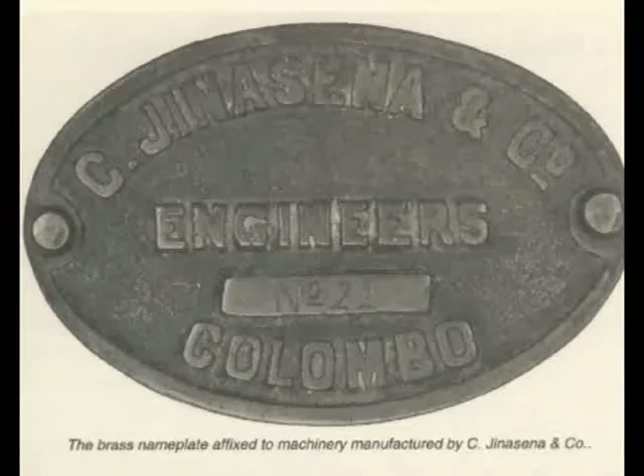In 1905, the vision of a bold entrepreneur named C. Jinasena formed a company called C. Jinasena Company, which today has grown into Jinasena Limited. The beginnings go back to Hospital Street in Colombo Fort, where the first business operations were the repairing of bicycles

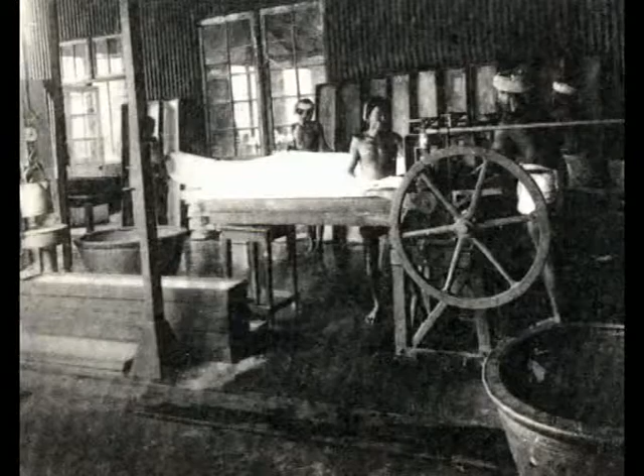and sewing machines. Gradually, growth took place, and the repair shop serviced machinery used in the rubber, tea, coconut, and graphite industries. Subsequently, a permit was granted for the vulcanizing of rubber, which was at that time an industrial process guarded by the British. In 1960, C. Jinasena relocated the operations to the current premises at Hunupitiya Road in Colombo 2. C. Jinasena laid down strict norms of quality which have been preserved in the workmanship of the products of Jinasena, winning much respect and standing today as a manufacturer.

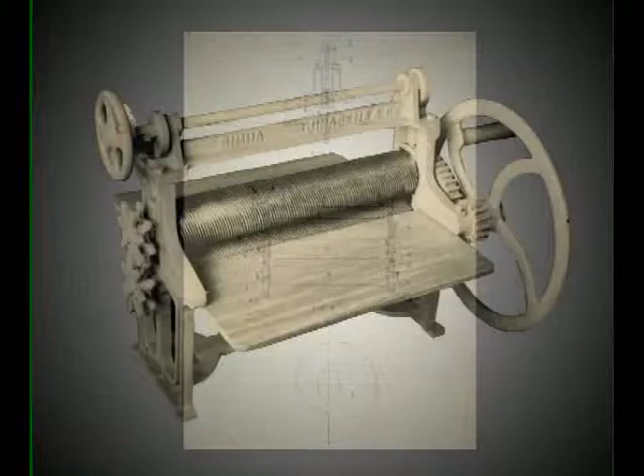The Singha rubber rolling machine, designed by the company's founder, was able to outsell British machines which monopolized the Sri Lankan rubber industry. With the demise of the founder, T.S. Jinasena took over the reins from his father and continued to develop the rubber rolling machine and achieved a revolutionary new design which used profile cams for raising and lowering the rollers.

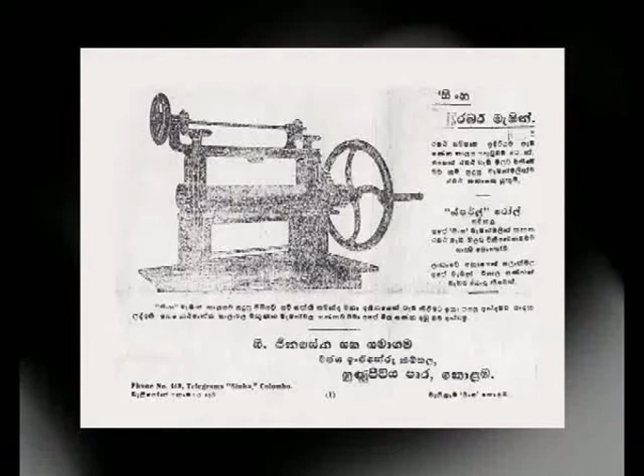This design was granted one of the earliest of patents for engineering goods in Sri Lanka and was produced continuously with much success until late 1960, when manufacturing of rubber rolling machines ceased due to production constraints.

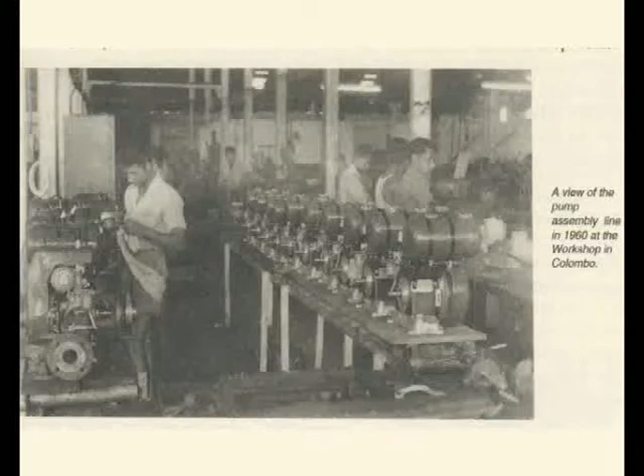Today, when one speaks of Jinasena, almost automatically one may start thinking of the famous centric water pump, which was the brainchild of T.S. Jinasena. In the late 1940s, with T.S. Jinasena as the proprietor of Jinasena Company, numerous pumps were imported from the United Kingdom for sale in Sri Lanka,

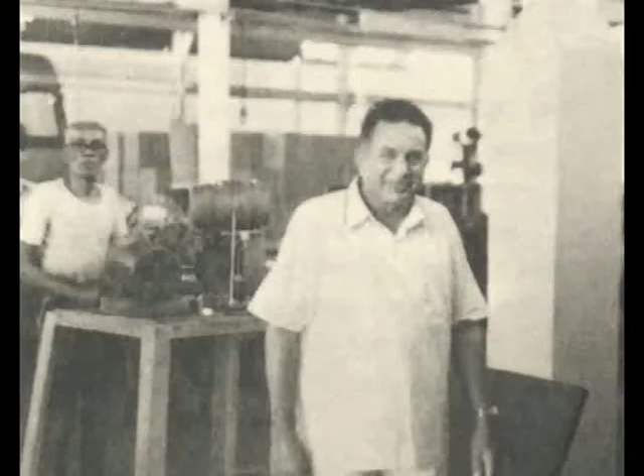and over a period of time, a vast amount of knowledge on water pumps, their designs, strengths and weaknesses were gathered. As a repairer of these water pumps, T.S. Jinasena realized that foreign pumps designed for foreign markets were not suitable for Sri Lankan conditions. Therefore, a plan was laid out with a set of design parameters for an ideal water pump for Sri Lanka.

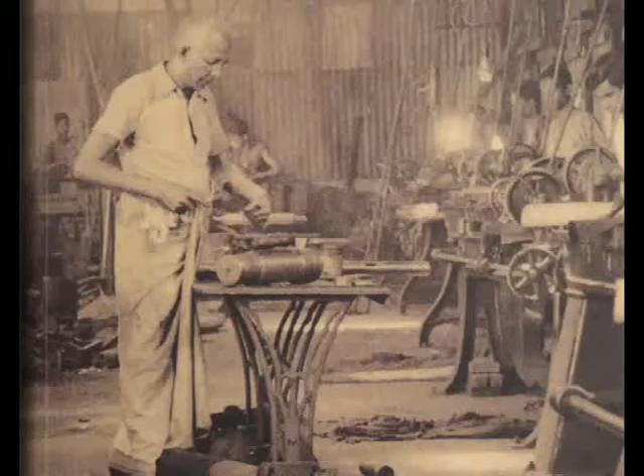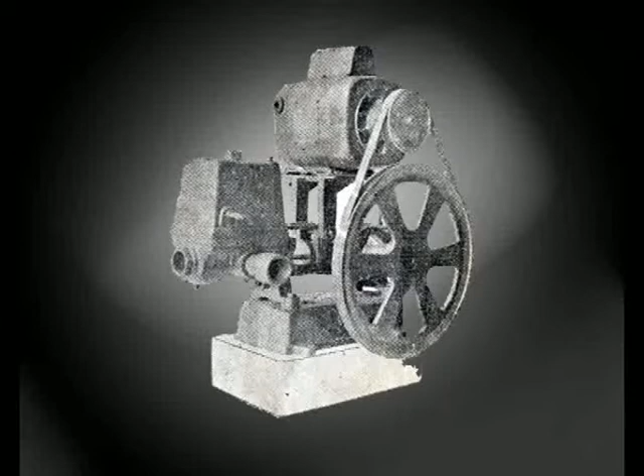Basically, these design parameters were a strong, robust construction, minimal mechanical components, a design which did not require any kind of maintenance for several years, and a high degree in quality and finish.

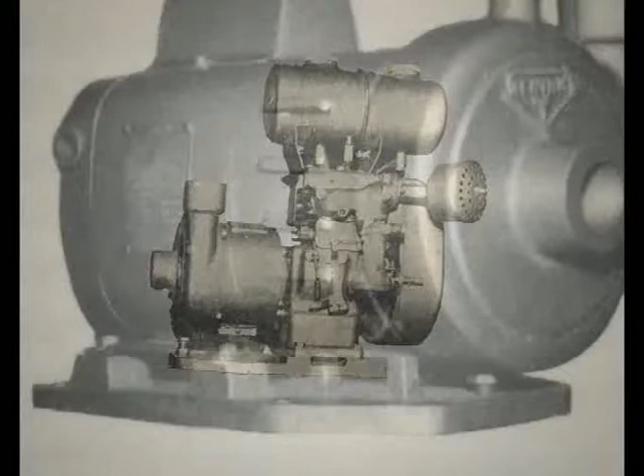The pump created thus resulted in the following special features: a water lubricated mechanical seal, a high quality British Hoover electric motor with special sealed for life bearings, a sealed unit which was compensating for wear and did not require maintenance or adjustments, constructed entirely of high quality cast iron with brass impellers.

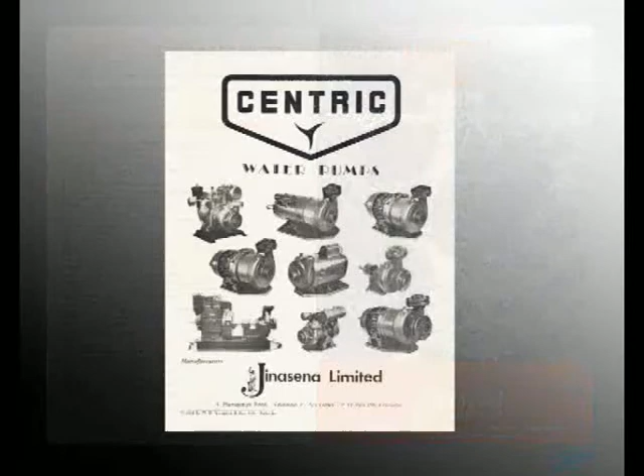When this pump was unveiled in 1950, T.S. Jinasena coined the trademark name centric, which was formed by playing on the word centrifugal, since this design was on the concept of a centrifugal water pump.

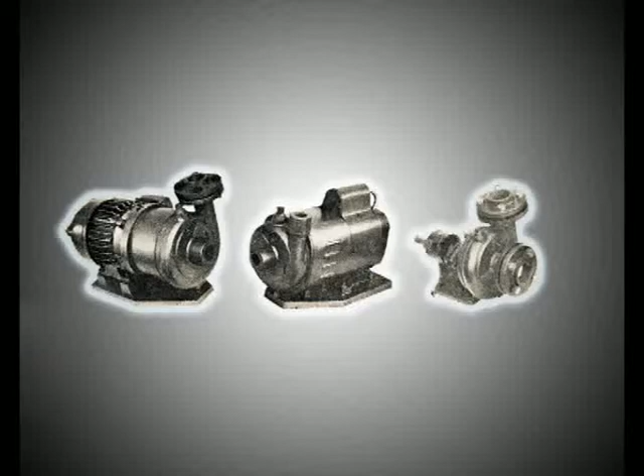At the time the pump was introduced, Sri Lanka had an open market economy, and many had thought T.S. Jinasena was wasting his time trying to produce engineering goods locally when it could be easily imported.

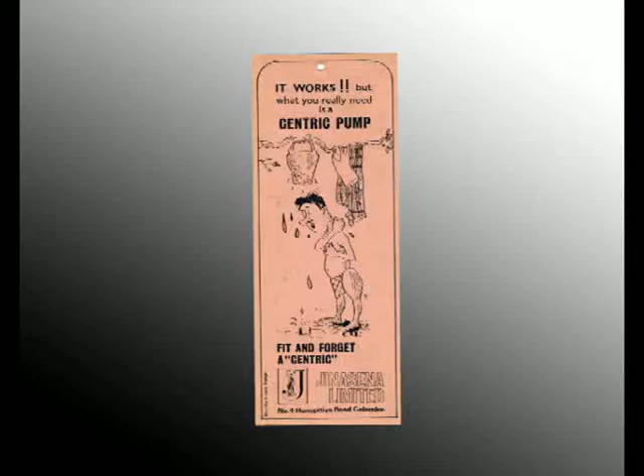The engineering and innovative spirit of T.S. Jinasena persevered, and by the mid-1950s, when the first signs of foreign exchange problems surfaced in Sri Lanka, Jinasena's was ready with a fully developed pump of better quality than anything that was being imported.

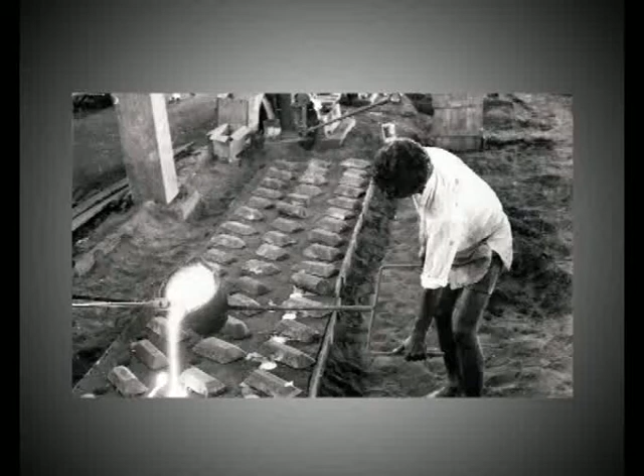The original pumps were of cast iron, and the existing foundry facilities were utilized to manufacture the components required for this pump. All manufacturing stages, from making wooden patterns to sand molds and cores, melting the cast iron components, are carried out at the foundries of Jinasena.

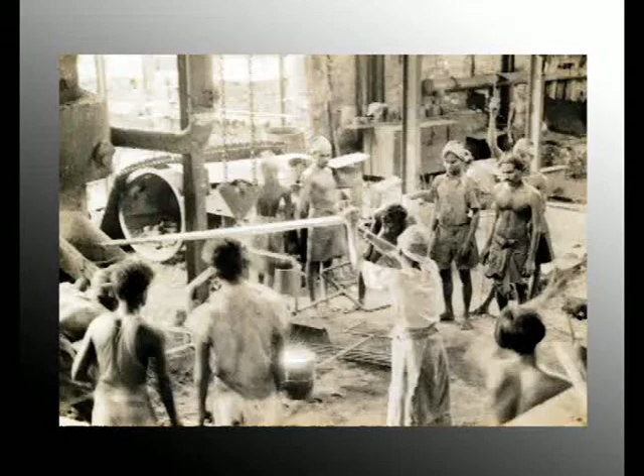The cast iron components manufactured were machined, assembled and tested as water pumps. Even today, the famous centric cast iron water pumps are manufactured in this same manner with the help of modern machinery and techniques.

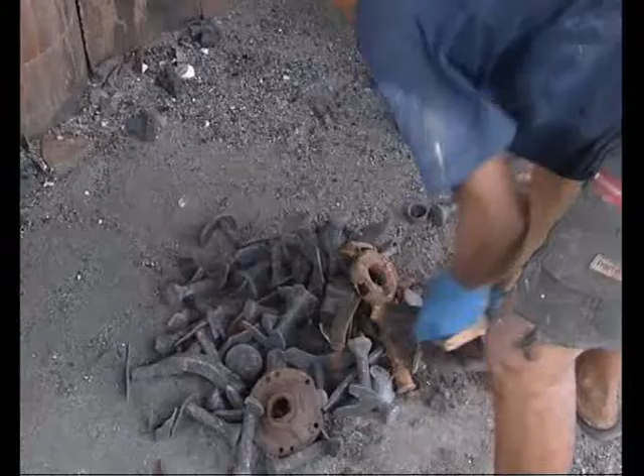Faced with the rising problem of the scarcity of raw materials such as cast iron and brass scrap, Jinasena's was quick to seek an alternate material to ease the manufacturing burden, yet maintain the quality and integrity of the centrifugal cast iron pump.

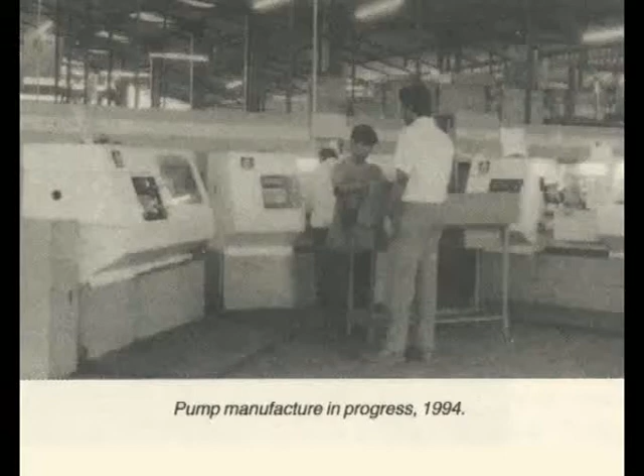Many years of research and development went into this process and finalized a suitable design where the components of the pump could be manufactured with polymer engineering plastic material. The first component that was manufactured using this material was the impeller, and after many failures, finally it was possible to have a product which was far superior to brass.

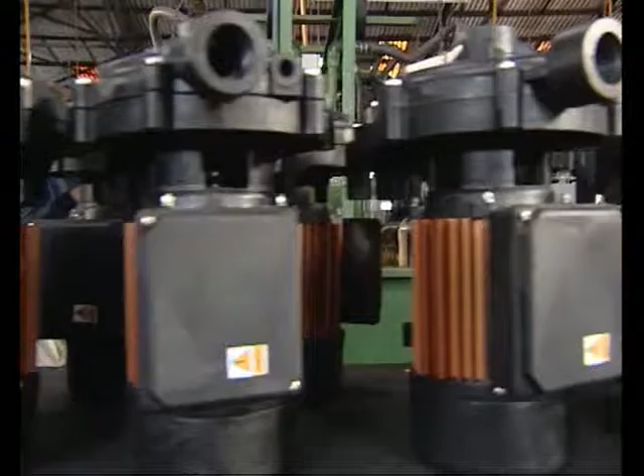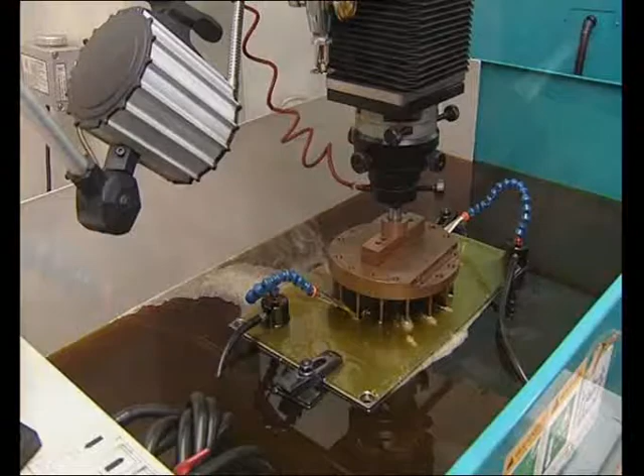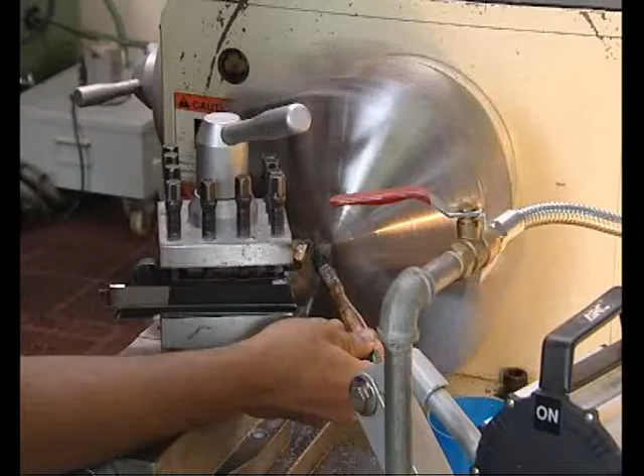The experience gathered in this venture gave Jinasena's the confidence to look at all other components of the water pump, currently being manufactured from metal, and investigate the possibilities of changing over to engineering plastics. The initial expenditure of manufacturing components out of engineering plastic proved to be high, particularly the cost of dies and molds, which had to be made from specialized steels that were costly and difficult to work with.

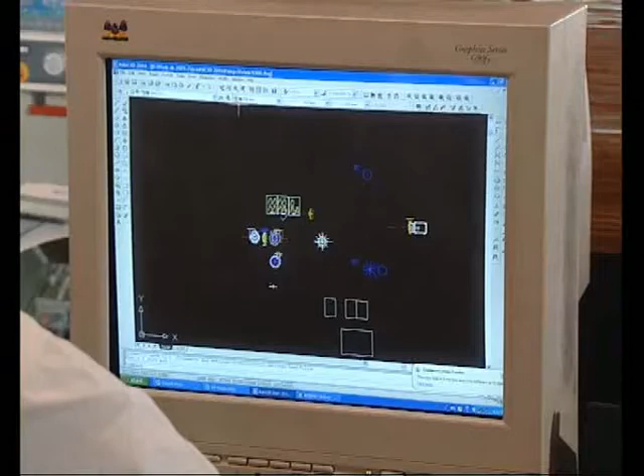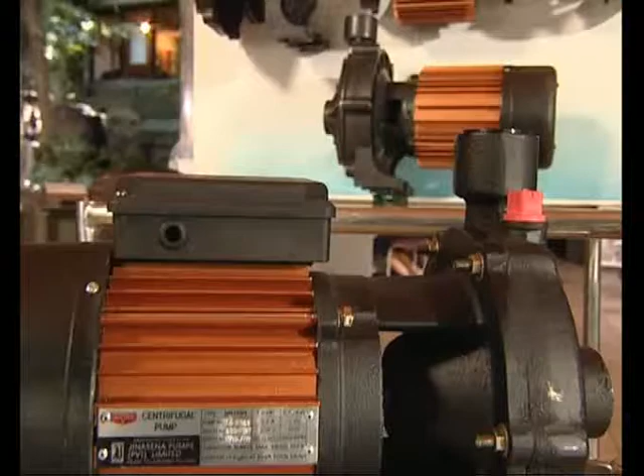Once, however, the expensive molds were completed, the manufacturing process was completely transformed to simple processing. Jinasenas realized that the limited facilities available in Sri Lanka would not help meet the development they had envisioned, and therefore decided to acquire CAD and CAM as in-house facilities. CAD is an acronym for Computer Aided Design and requires extensive training in the use of the computer as a design tool. Once having acquired this knowledge, the manufacturing programs which were designed were then utilized in computer-aided machine centers which were fully computerized.

Acquiring this facility was a heavy expenditure, but the end result has proved it to be a wise decision. Jinasenas are proud to say that they are one of the few manufacturers in the world who make complete water pumps, which except for the electric motor, is entirely of high-grade polymer.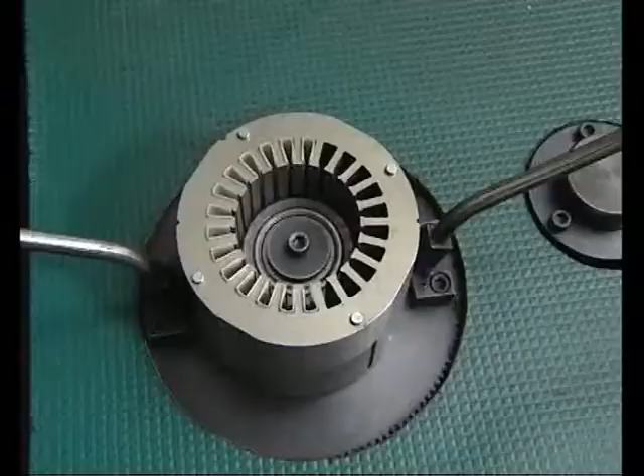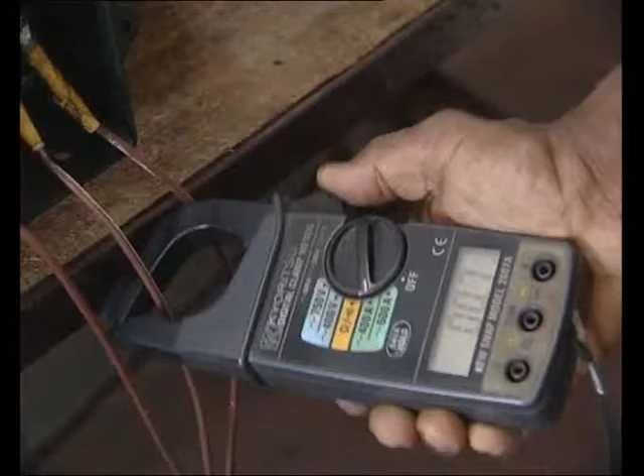While Jinasenas worked at developing the pump, in the early 1970s they realized that to be a truly Sri Lankan manufacturer, it was necessary not only to produce the pump but also the electric motor, and it too should meet the rather difficult Sri Lankan standards. In designing the motor, certain matters were taken into consideration, such as extremely low voltage conditions, sudden power surges, high humidity, and lack of proper maintenance.

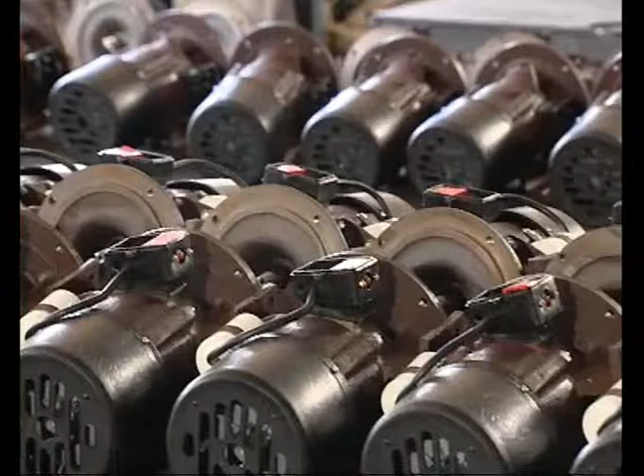These problems were taken into account and met with special features when the motor developed by Jinasenas finally took shape. The motor is manufactured by Jinasena Electric Motors Limited in an ultra-modern factory with a high degree of quality.

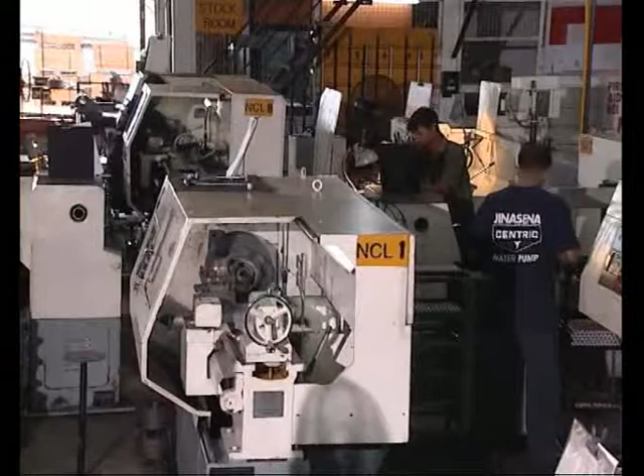All single-phase motors are fitted with British-made manual thermal overload switches which protect the motor against low voltage and high temperature rise. The winding wire which is used is of the highest quality available in the world, unlike low-price motors available on the market. The JEM motor goes through a comprehensive insulation process prior to assembling.

These attributes have given the JEM motor a significant advantage over all its competitors, and is a main reason for the long life of all centric water pumps.

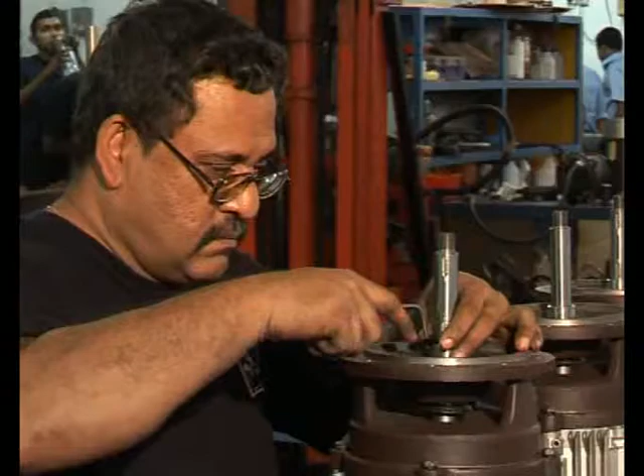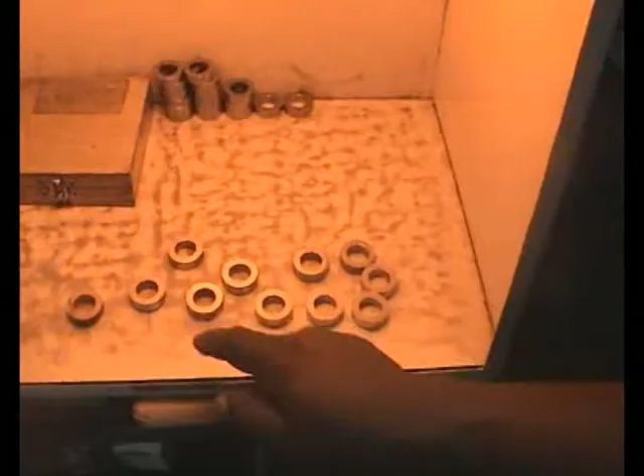Jinasenas are also independent manufacturers of water seals which are used in all of the water pumps manufactured by Jinasenas. All components of the seal are carefully manufactured in a special factory where the seal surfaces are polished using modern polishing techniques. The seals are specially designed for the centric water pump, and is another unique feature of Sri Lankan innovation and quality.

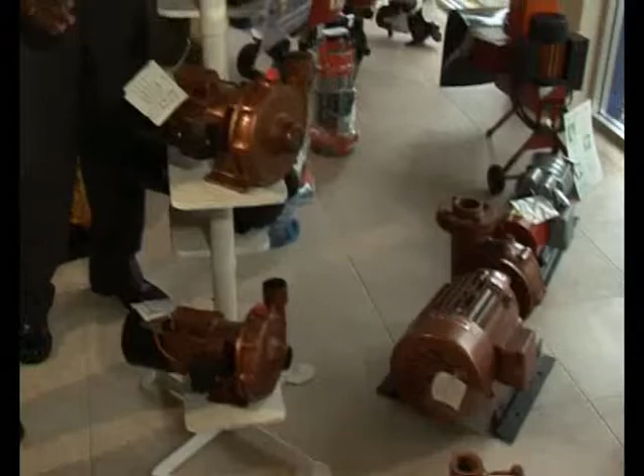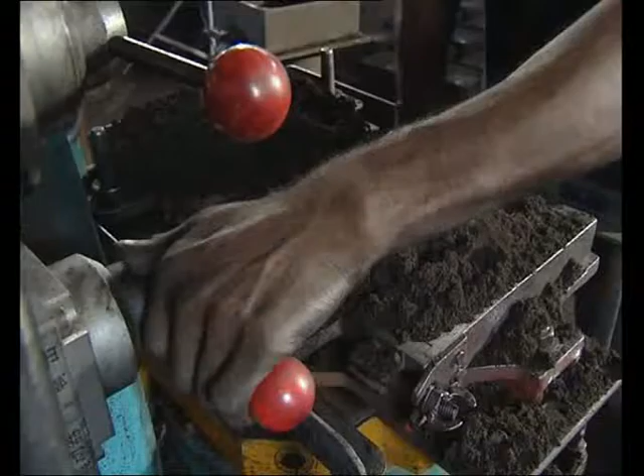It is therefore clear that Jinasenas are not assemblers of components imported from China, nor are they importers of low-price pumps which are later labeled in Sri Lanka. Visiting our factory complex, you will have the opportunity of seeing the complete process at every stage of manufacture. Jinasenas are proud of their achievements and wish to share these achievements with all Sri Lankans.

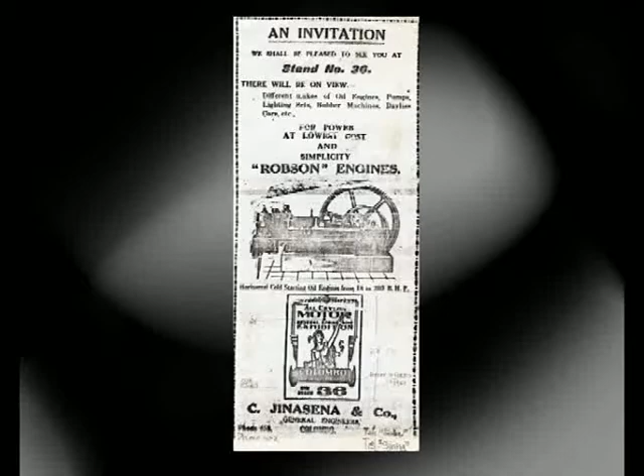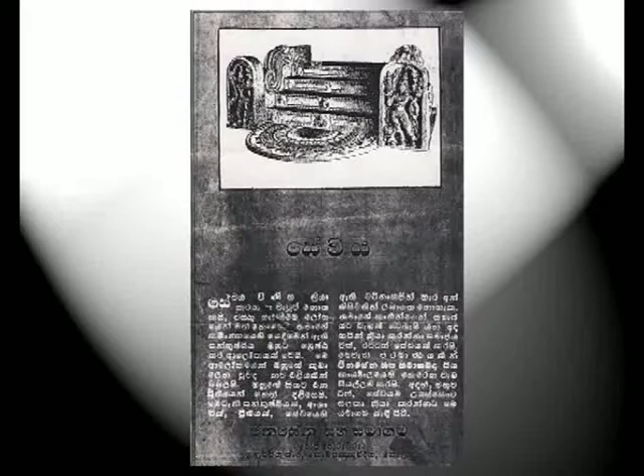Through a long journey which spans from the 1950s to the present, the centric water pump is manufactured entirely in Sri Lanka using Sri Lankan innovations and Sri Lankan labour. At a time when other operators in this trade deceive the Sri Lankan public by importing low-priced pumps from China and labeling them with local names, Jinasenas stand proud that their trademark and the product that carries this trademark is truly and proudly Sri Lankan.

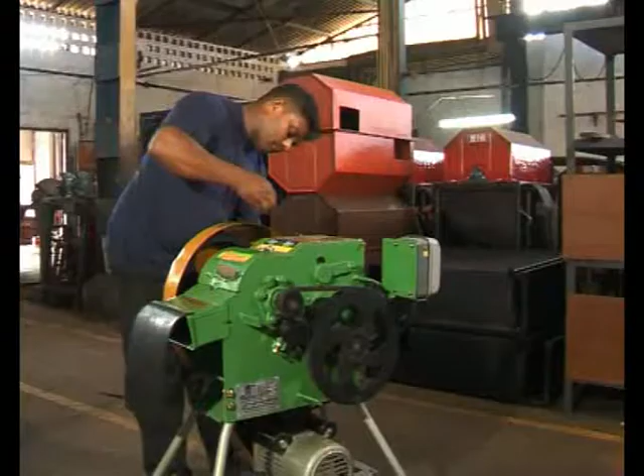Continuing this proud tradition of manufacturing equipment of the highest quality of Sri Lankan design, Jinasenas also manufacture agricultural machinery required for agriculture, marketed under the trade name Agrimec. Many of the features in this machine are of Jinasena origin and have continued to maintain the high traditions of quality synonymous with the name of Jinasena.

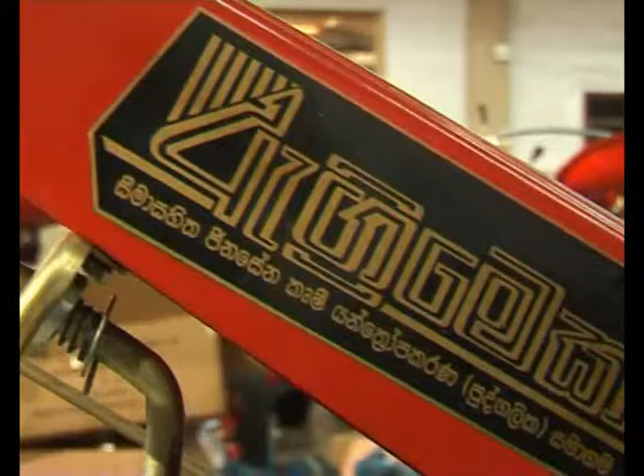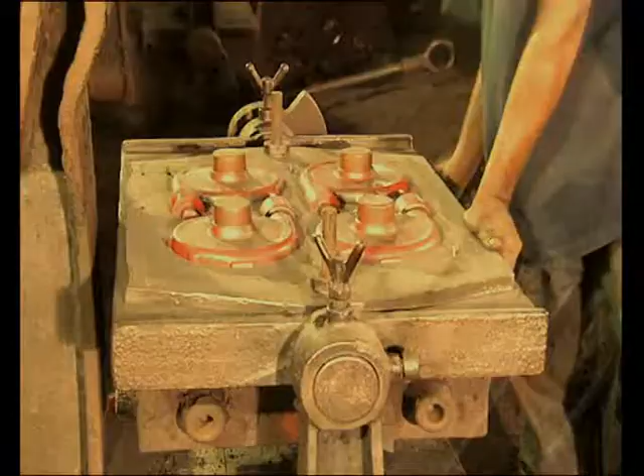In this short video presentation, you will see the manufacturing processes adopted by Jinasenas for the manufacture of centric and Agrimec products. It is noteworthy that Jinasenas are the only engineering company which manufactures a product in Sri Lanka, rejecting the current scheme in operation where low-price imports are marketed under local trademarks.